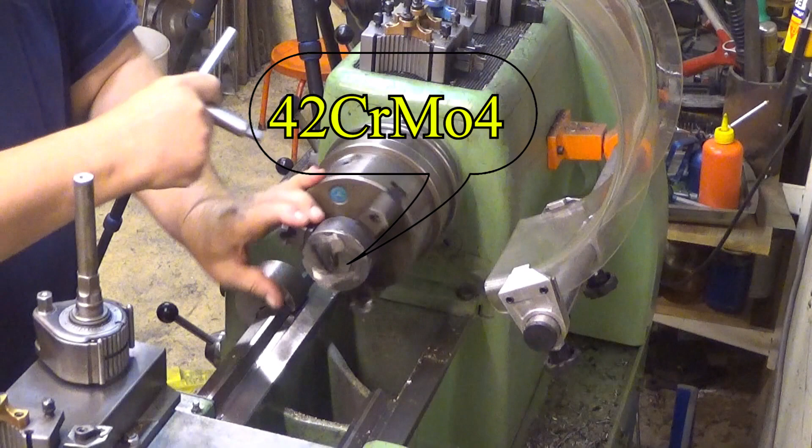Okay, so I have turned these jaws in order to get this comfortably into there. Let's tighten it one more time. This needs to stay there. This was tight. Tight. Tight, yeah.

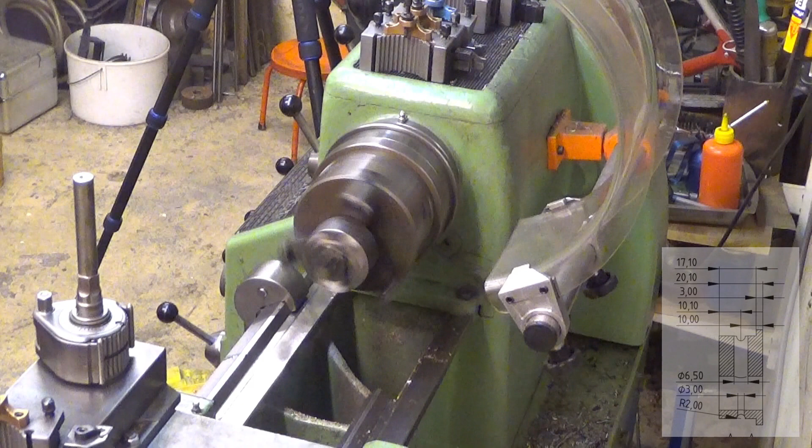I think we should try to run this about 600 RPM. I don't want to... Okay, it's okay. And then I'm using this VNMG tool first to face it. So now let's touch it first.

Well, now I'm trying to get a good surface finish here because this is going to be our final surface. So I'm running this at the same speed, about 600 RPM, and I'm no more feeding it manually. It will be 0.076 millimeters per revolution. And this tool, this bit, is different. It's now Cermet with a very nice round corner. And I'm peeling off about 0.1 millimeters here.

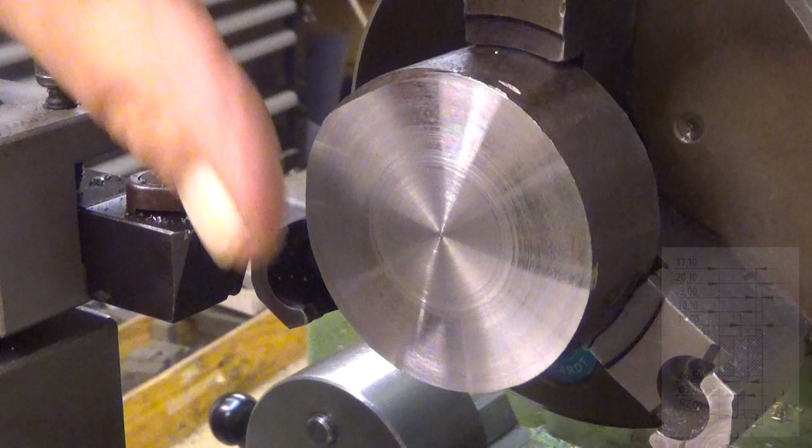Well, let's see now. You probably noticed I raised the speed. Yeah, and it's silky smooth.

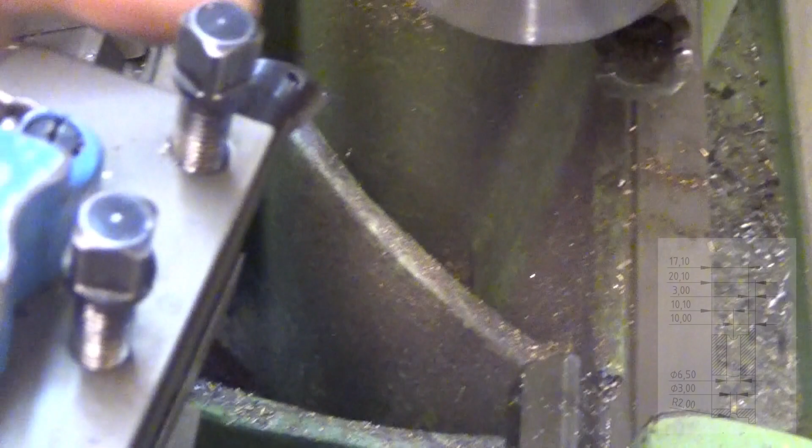So now I have here a boring bar, like that. This is upside down because I need to reach into there, and this is the only tool that I can get near enough here.

Well, okay, but we need to limit the travel from this surface to the shoulder. It should be 20.1 millimeters. I will first cut 20 millimeters there, and after that, the last 0.1 I do differently.

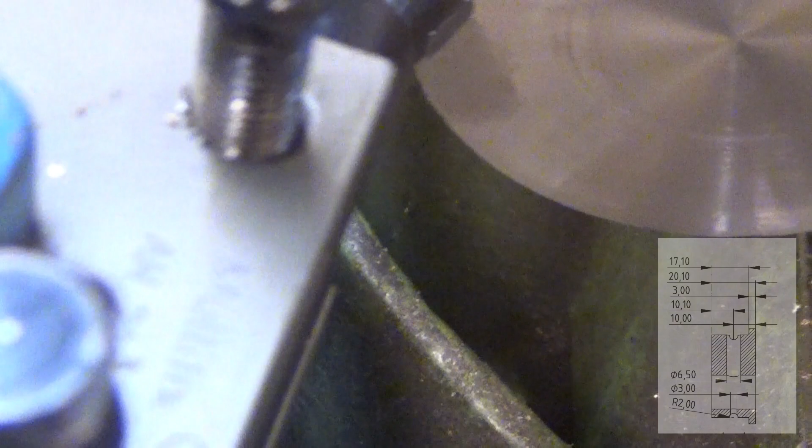Well, now the first thing is to put this tool into contact with, let me show you, put this into contact with the workpiece surface very gently. I can feel it here in the wheel. Now it is in contact, and it's really just gently there.

Well, of course I have locked the compound and everything, so this is not used in this case. So now when the blade is there, we zero this one. This is my travel indicator. It's at zero. So then I retract this from the surface, away from there.

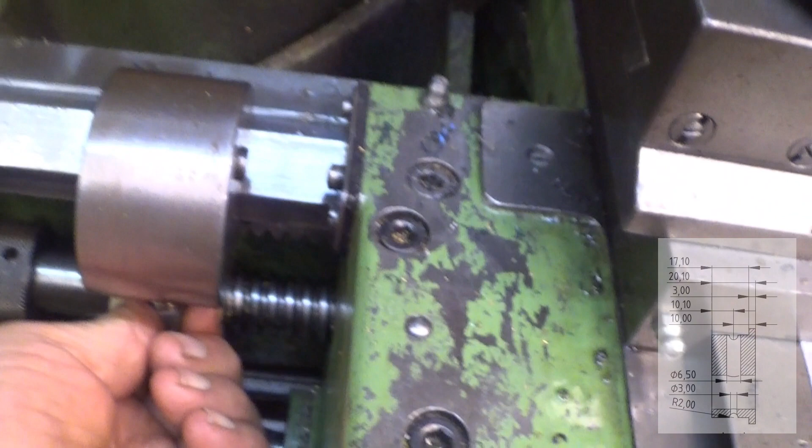Okay, and then this is the carriage stop. I put it against there and tension it even so slightly so that I can still move it, but it gives me some resistance. And then I dial here 20.

So that was 10. Let's check that everything is alright there. Yeah, well, let's put it into a place where everything is really right. So that's 15, and there is really some resistance here. Wow. Maybe, oh well, yeah, okay. That's quite exactly 20. And then I tighten this.

Yeah, there you are. And now, well, now it's just to turn this. It will stop.

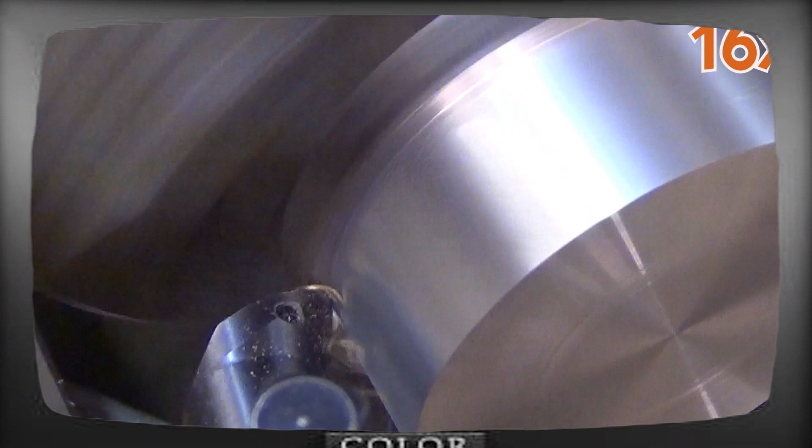Let's put this so that it's almost out of the way, because this is throwing chips all over the place, and then it produces these hot worms, hot snakes. This is because the material is really tough. It's tough. And I'm advancing here 0.5 millimeter, and then we go again.

Wow, but the surface is really nice. Now we should have a tenth of a millimeter to go, but I want to be sure of this.

Yeah, well, if I take a tenth, I end up being a little bit too loose. So it should be almost a tenth. So something like 7.5 microns, no, 75 microns.

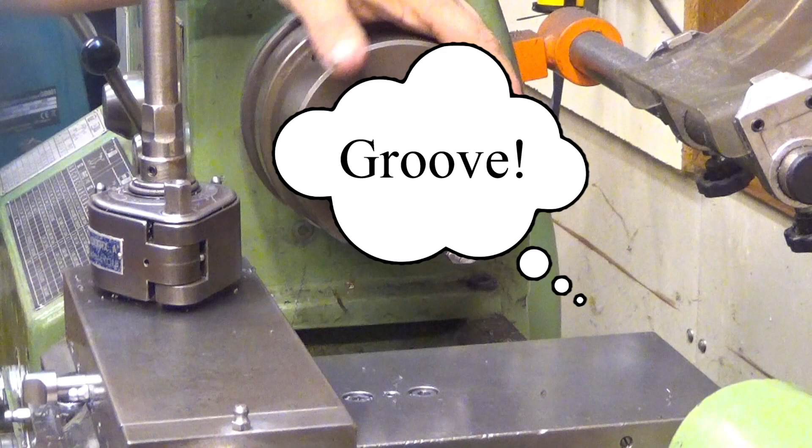So, well, the workpiece of course burst away from there. There you are. Wow, wow. Let's put it there. And then the jaws, first one.

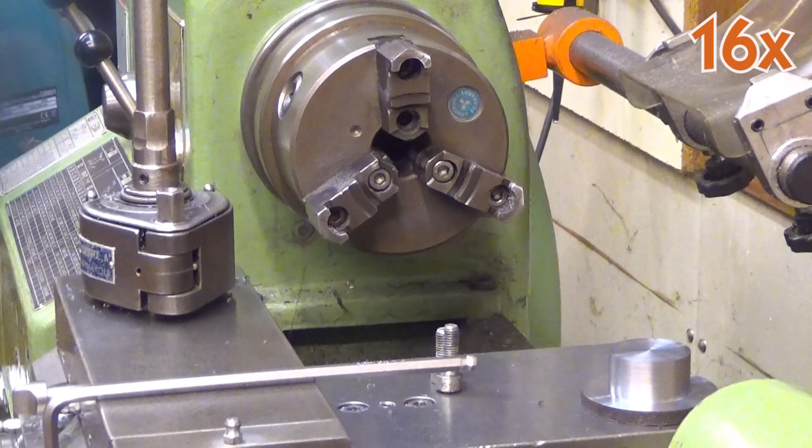There you are. And I want this to be something like 47 millimeters. Yeah, it's 62. Okay, so let's see.

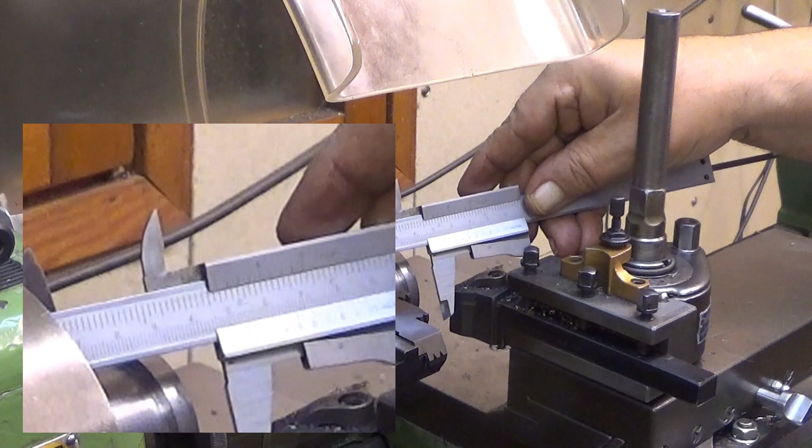Well, now it should be 47. Remember, our goal, the final diameter for this is 45. So, I hope you can see this so that it focuses. It's quite near 47, and now I just turn it around.

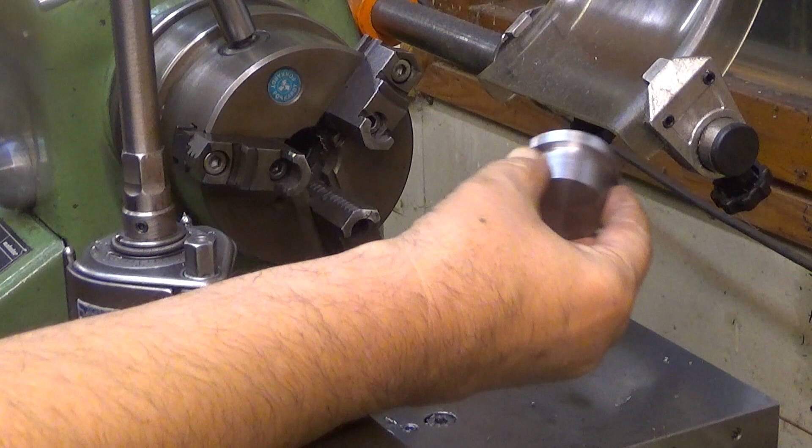Now let's turn it around. Well, here, now it should fit more comfortably than the earlier time because, really, I put it about there. Wow.

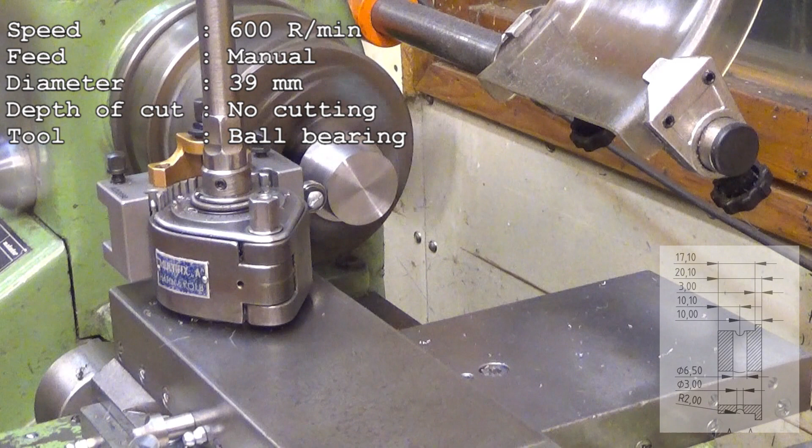Pull it back very slowly, like that. There you are. Now it should be as straight as it can be.

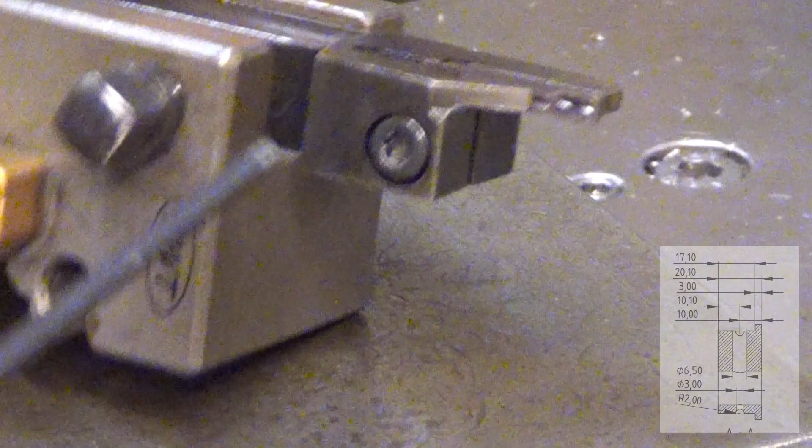I will zoom you nearer so you can see what this is. Okay, this is my normal parting tool, and that was filled with stuff. So, and this is the Torx.

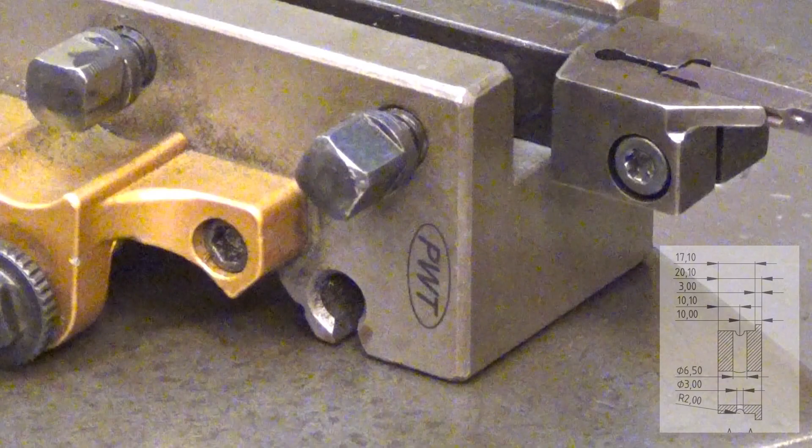Is it like this? Smaller. I bought this as new, and yeah, that's the one. A Torx. Okay, so we'll take the blade out, and then I have

these are made by ISCAR. I found these from a flea market, and if you can see, it's not straight at all. It's like that, but it doesn't fit into that tool holder, so I need to use some construction here. That fits well, but then I need to put something here in between, and that's actually the correct width.

And now just push it against there and then tighten it there. There you are. We have a grooving tool.

Okay, setting the correct place for the groove. The groove should be measured from this surface. It should be 10.1 millimeters away. The center of the groove.

If I now go, yeah, 10.1, then that's 10.1. There, well, the accuracy of that device is 0.1 millimeters. So, there you are. Well, of course not with this speed.

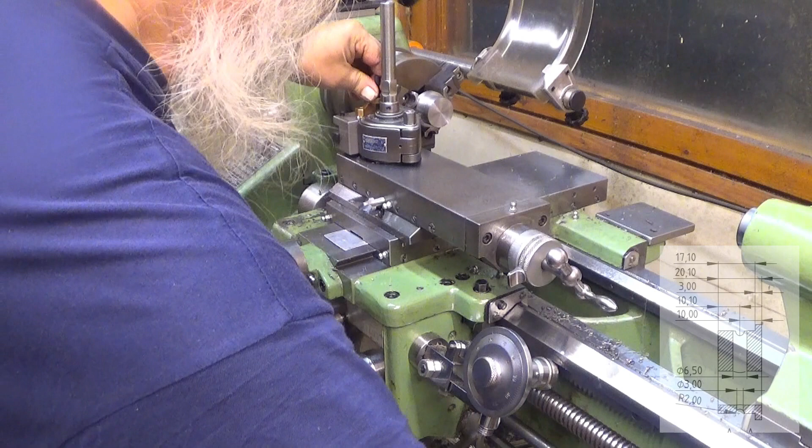Probably a little bit high. It doesn't want to grip into there. Well, this means that I need to fix my parting blade after this. I need to lower it down just a tad.

Let's try that. Because it needed, well, probably the blade is dull. So let's see about this. I need to do everything again, but such is life.

Let's see, for the center height of this tool. Well, it's way high. Okay, that explains it. It was really high, like 5 millimeters. That's bad.

And that explains it. Can we align with, well, 10.1. Yeah, I didn't lose it. So

now it should cut more freely. Let's see. Yeah. Huge difference.

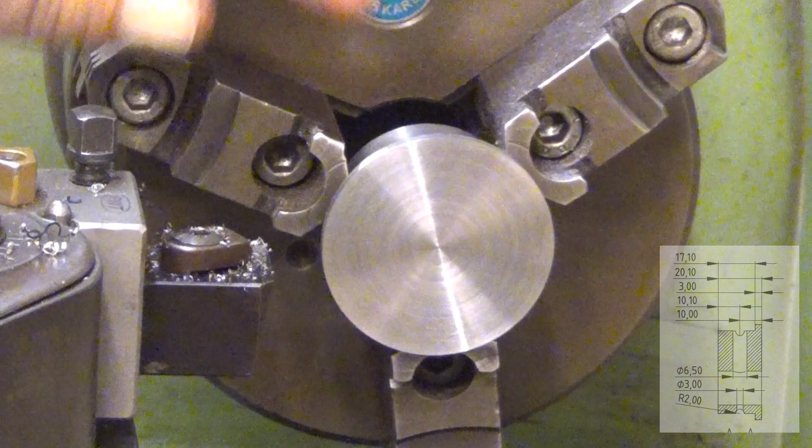Yeah, okay, let's see, it's really smooth. Okay, and now it should be 3 millimeters. Quite exactly, actually.

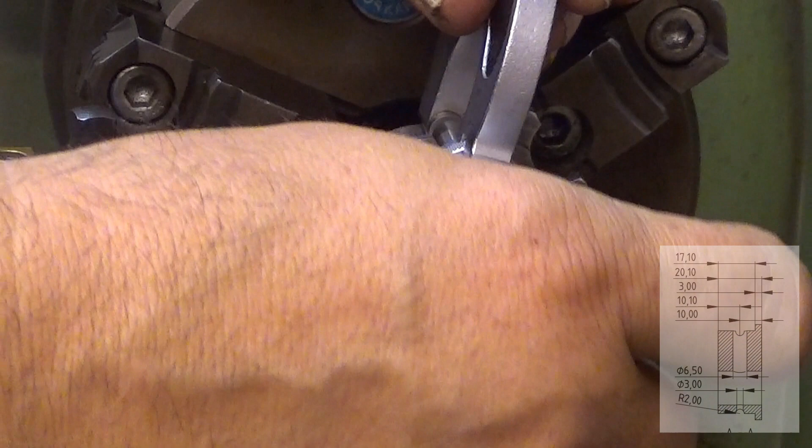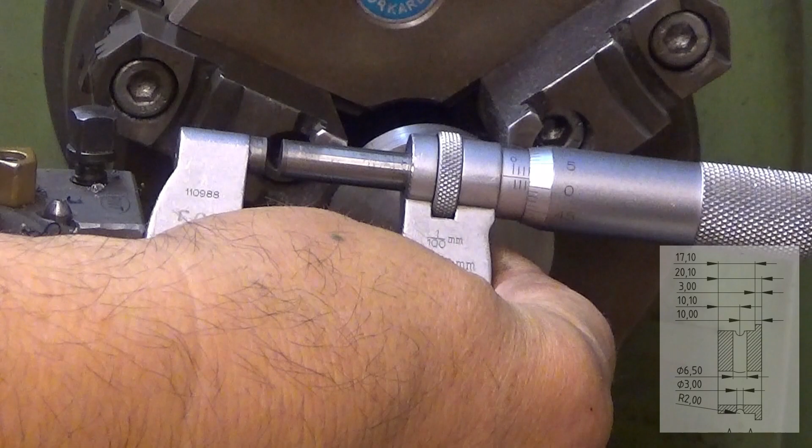Doesn't deviate too much.

And now I will make the same for this surface, and now I don't know how to, well, I know how to, I just need to do this really gently. So, now it should be straight enough for that kind of operations.

And apply again. At least it's shiny.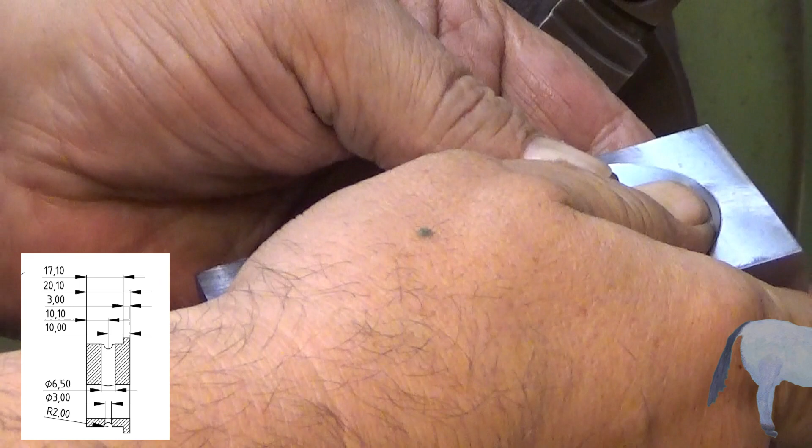Oh man, that's not good. That's too much. Why? What did I do wrong? Is my dimensions, my dimensions, well, it's a perfect fit otherwise. Oh man, but why this? Wait a minute. Yeah, 17.10, not 20. This is now 20. 70. Can I face it?

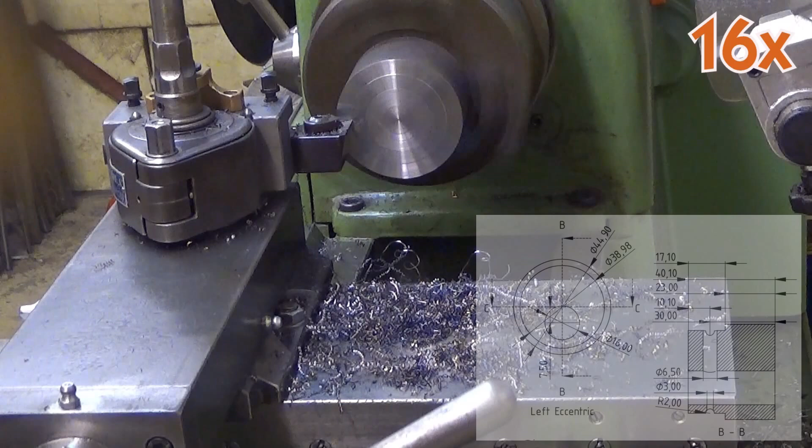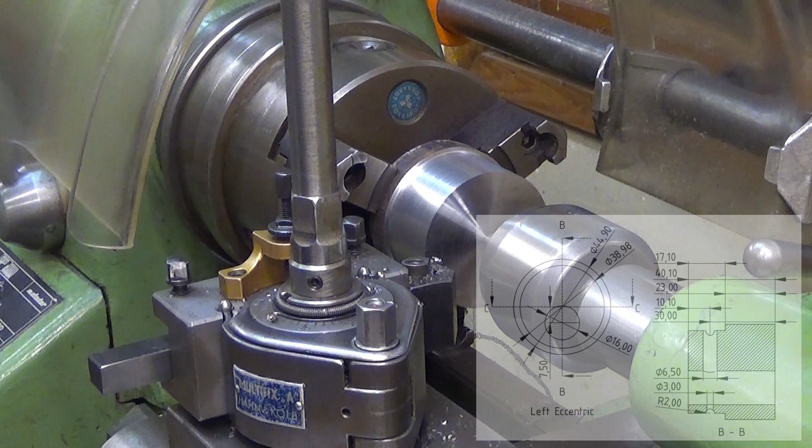That's really bad. Wow. Well, the chips come out blue. Hot snakes, really.

Well, I finally solved the riddle of chip breaking here. It's actually the speed. If the speed is like 600, the chips become blue and then they become really long, not good. So now I'm running this at about 300 RPM. My feed is 0.152 millimeters per revolution. The cut-off depth is half a millimeter from diameter, so 0.25 from each side. And the chips become about this long.

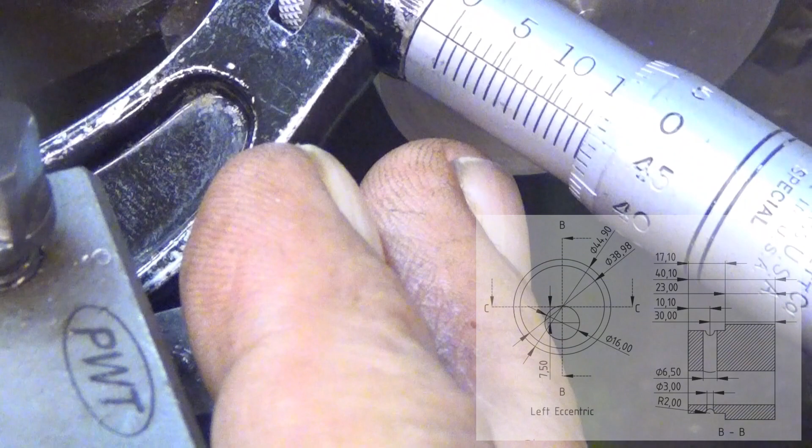Let's see now. This should be 38.98 whatever. Well, 95 seems. 38.95, quite exactly that. Well, here is now the place for this groove. Well, let's make it.

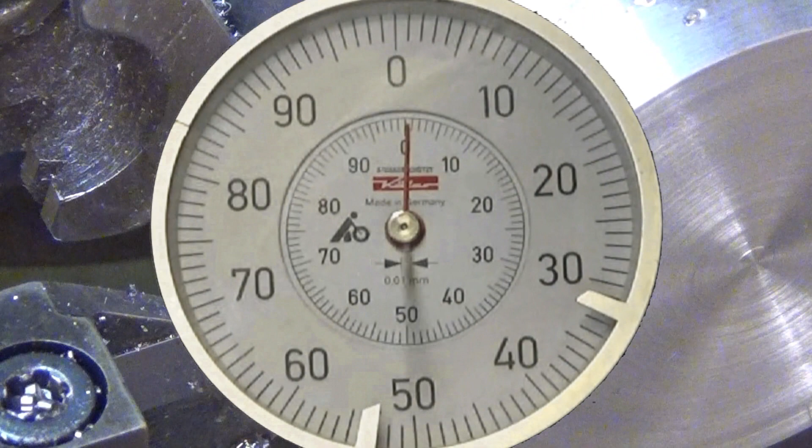There is a groove. This workpiece. First I will now dial it in into there. Okay, that's okay. Tighten it there. We have a very steady base for our dial indicator.

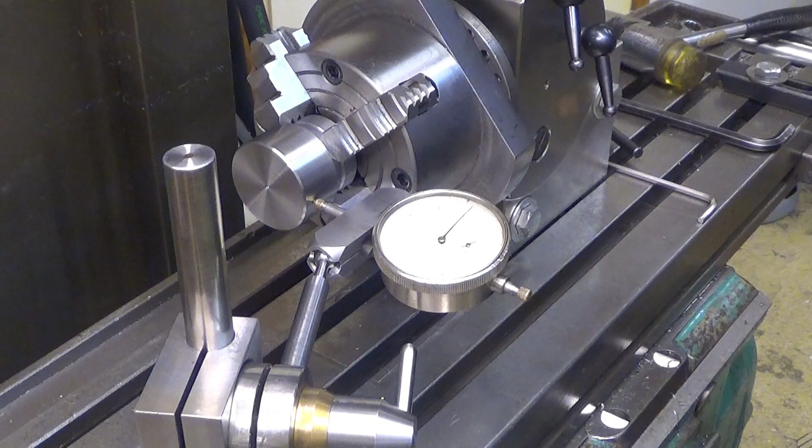And then I put this here, and then we have our dial indicator. Just planning here. Okay, like that. And like that. Oh, okay, it's about in the middle. And then let's turn it so that you can see it. Well, I should also be able to see it. So let's see that we can rotate these now, and we cannot.

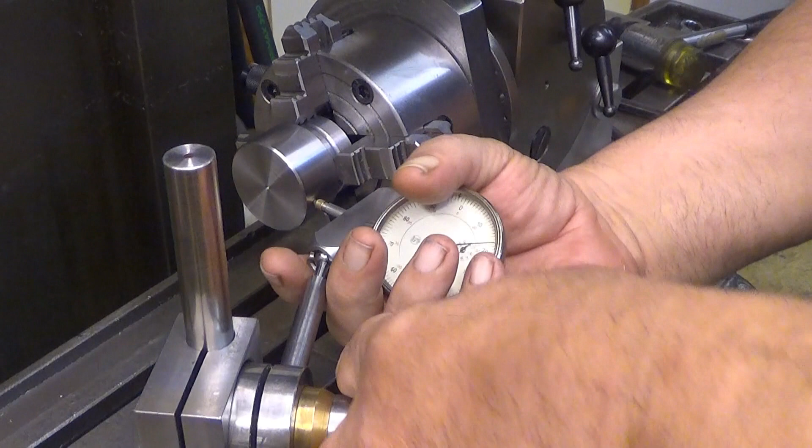Well, now we are there. And it's about, the tip is not, it's tilted. Well, it's tilted. Why not make it straight the same way? Now it's about straight. And as you can see, this is really steady. Of course, I can push it, but it always returns to the same point. This kind of dial indicator stand is one of the best.

Okay, now the next step here is to find the minimum. Well, it's way off. There is our minimum. Like there. And then let's see if it's over one turn. And it is. Okay, that's high. So I need to just put it coarsely there first. Let's loosen this one here.

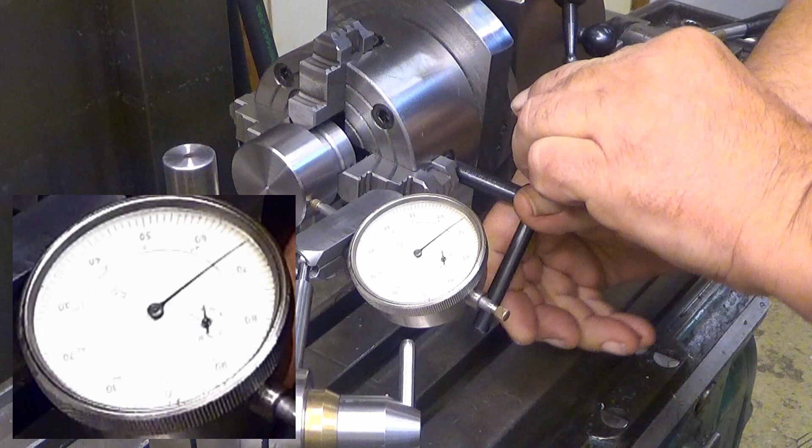This would be a very tedious process if you do it the wrong way. Okay, let's see now. Let's find the minimum again. Well, now it's a lot better. There is our minimum. I put my 0 there. Okay, maybe, yeah, maybe. And then I find the maximum, which is, wow, 50. Okay, so midway is 25. So all what I need to do now is to dial these to 25.

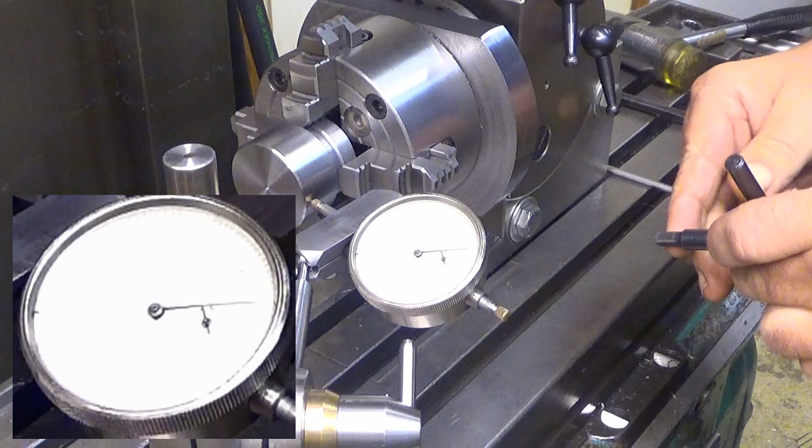Oh, that's the wrong way around. And yeah, this is really like, you can do this in one pass if you are careful enough. There is the 25.

Okay, then we go to the next pair of jaws. I put them, okay, like that. And then this one should be a little bit that way. Let's just dial them to 25. That's because that was the midway of the minimum and maximum. Now, well, let's see.

As you could see, now we have some very slight deviation there, like two hundredths. Our midway was not correct, it was not 25, it was something else. There is that now. And then this also a little bit like that. There you are. Well, it's a little bit still.

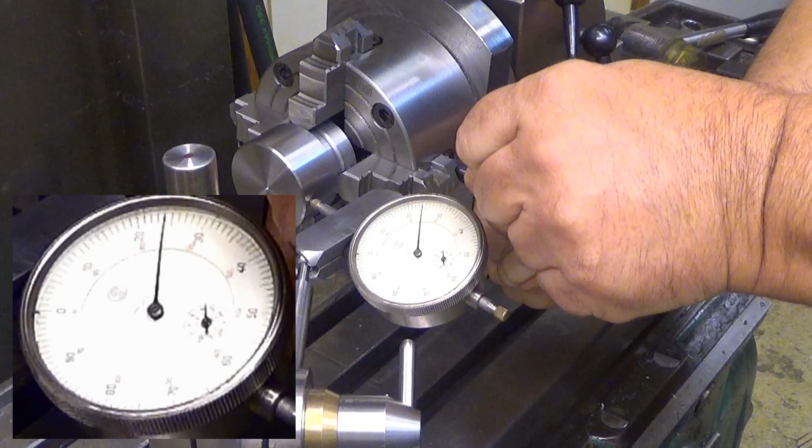When I purchased this, I cleaned it up, this dividing head, and tightened everything. And it's not a loose thing, this. And now you can see it's there. We did dial it in, and it's not a tedious job like in an ordinary four-jaw chuck, because this is so accurate. And it's, well, you have to have a very steady dial indicator stand. If this would be the ordinary one, it's so easy to stumble into it. And then your measurements are all wrong.

Well, I can remove this now. And I can remove this. Well, it's just a T-nut, a very heavy-duty washer, 16mm shank, and well, works like a charm. Oh yeah, and that rod, it's hardened, case hardened, very tough material.

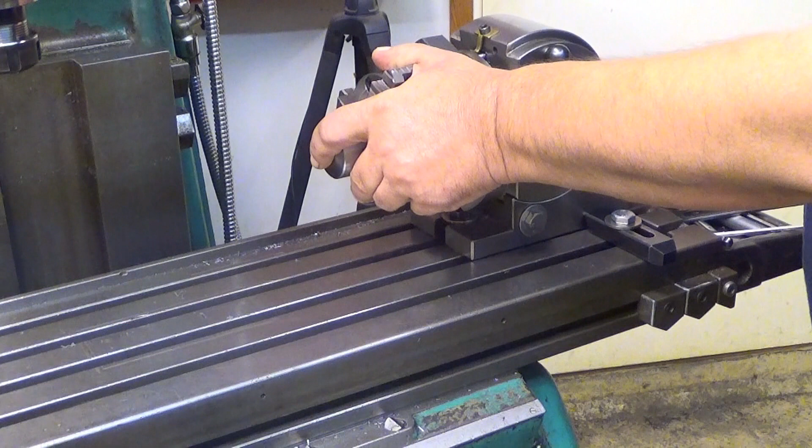Now it's quite far away. I have a thing like this. Seems to be straight, and it's leaning against the fence. Yeah, there it is. Just tighten it into place.

Oh, this is a little bit. Well, now it is, yeah. I'm looking for these jaws that I can fit comfortably there. There you are.

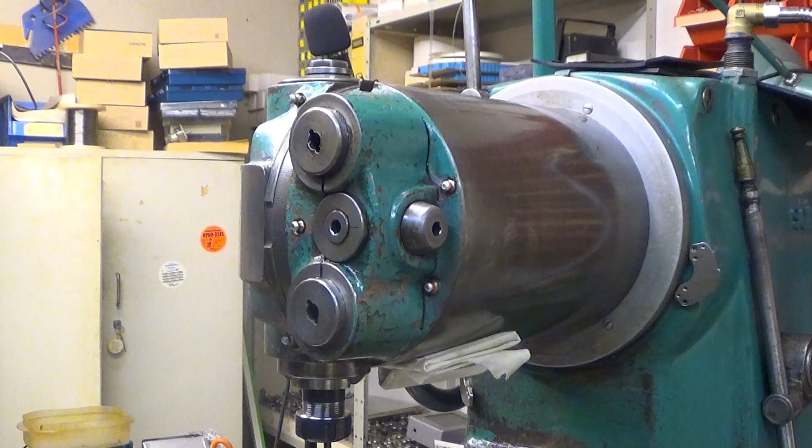Now it's positively locked. Doesn't rotate at all when I use this indexing mechanism here. Okay, and now we need to adjust this to a correct position, and this one is pretty easy. You just loosen the brake and then you turn the head, and you have to be really careful not to move it sideways, but just rotate it. And this is actually quite easy with this machine. You can do it like this.

And then I search here for zero, index it there, put the brake back on and remove the index. This machine, if you have these series 51, 52 or 53 machines, they have an indexing mechanism for this rotation. And you should always disconnect it after indexing, because if this catches something, it will try to rotate the head, and if that indexing mechanism is engaged, it might damage it. Yeah, okay.

I have not moved the table in Y direction, so we should be good to go.

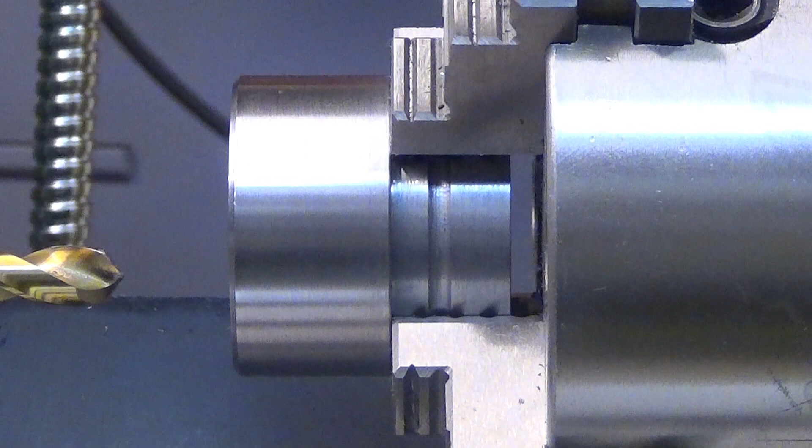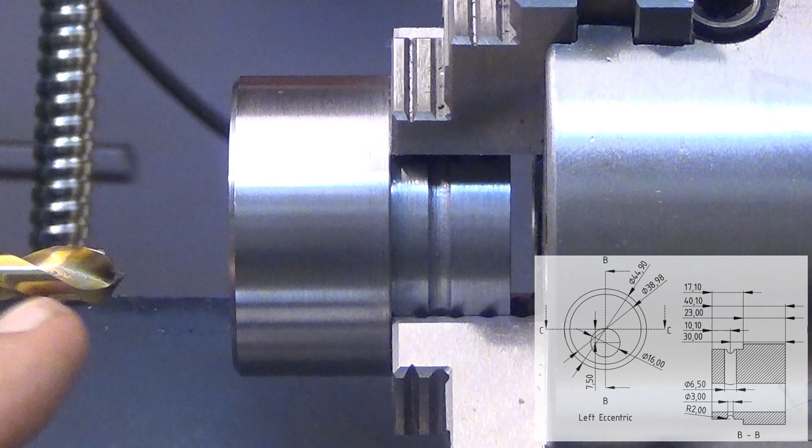Well, now let's drill. And when you are drilling like this, don't forget this. There are very good chances of bad things happening here. For example, if this rotates, it might bind your drill, and at least my milling machine has enough power to shatter this, and then you have high-speed steel fragments, which travel really fast. It's better to have one piece of those sticking on your forehead than sticking in your eye.

Well, I'm running this about 400 revolutions per minute. Let's see. Yeah, and I'm feeding this manually. Yeah, so let's go.

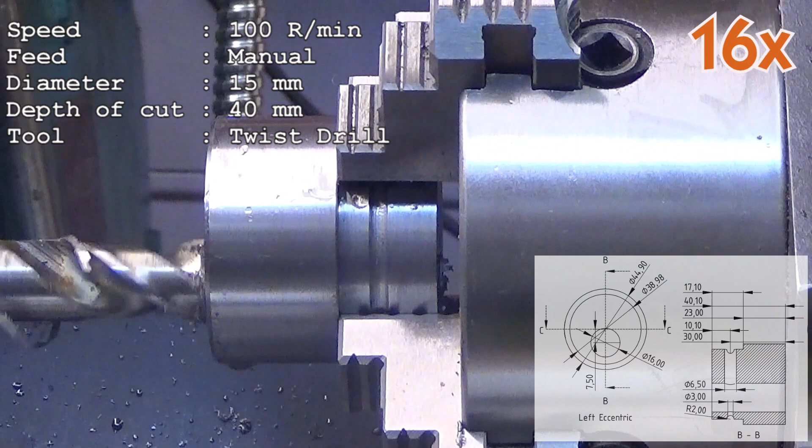Okay, that was easy enough. Let's take these and put them into the bin. Whoa, you have to be careful, those might be sharp.

Yeah, okay. And then I will change something here. So it's in back gear, so I can loosen it. That, my knocker again, like that. Hopefully, yeah, it comes. That's one of the benefits of this type of taper. You don't need a lot of room to take them out.

Should go there. Does it? Well, we need to lower the table a little bit. Well, 10 turns. 1, 2, 3, 4, 5, 6, 7, 8, 9, 10.

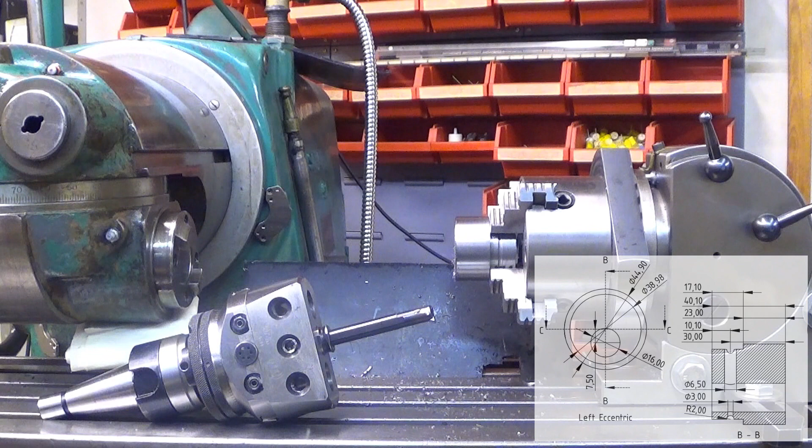What I will now do, I will remove this from there. Now it should go quite easily actually. Yeah.

Then I put this in free gear so I can rotate this freely. This is really not good. Okay, maybe we can do that. I need some visual reference here. When I tighten this, so I put, there is a flat here, but you can rotate this quite freely.

But now I put this here and try to make it level. Oh, man. It's about there. Yeah, and then I tighten it in place, and this is really, it has very tight tolerances, this thing, and while it's now there.

Wow, I think we need to back it up somewhat. This knob locks the ways and things, so I pull it back like that, and then let's go into the bore and let's touch. This should be sensitive enough so that, yeah, there it is.

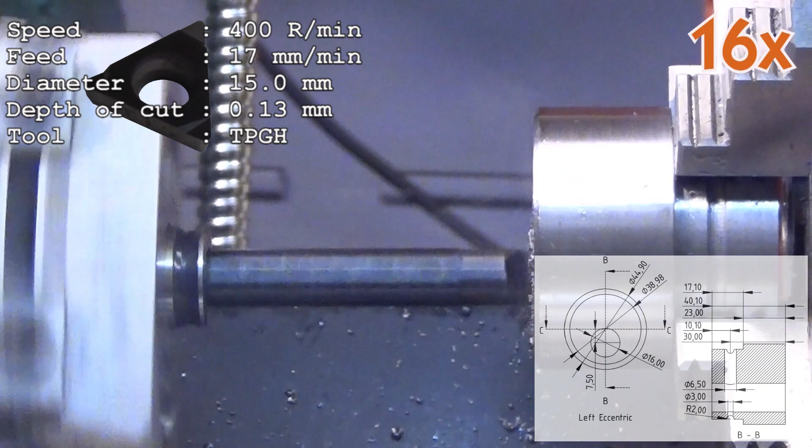Well, let's now measure this one. So first I need to move this so that I can put my measuring stick inside there. So I lower the table 10 turns here. 1, 2, 3, 5, 6, 7, 8, 9 and 10. So let's put this into there. So, and then push it up.

Until it, well, not good. Maybe I should move a little bit away that way. Okay, now. Oh yeah, okay, now it works. Well, we are at 15.27, I think. Oh, 73. Okay, but we are now on 0 with this one.

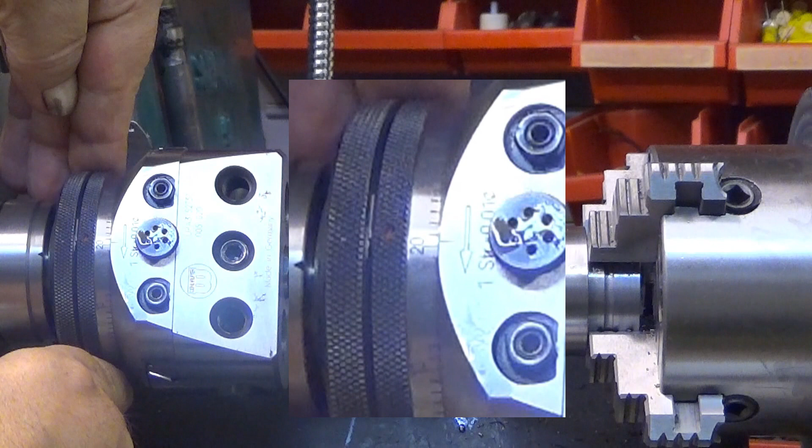So that's easy. 27. But I don't want to push my luck by dialing everything at once. So I think we can safely take 0.2 millimeters at a time. Let's take a little bit more, like that. And then 10 turns up. 1, 2, 3, 4, 5, 6, 7, 8, 9, 10.

Wow. Well, 1, 2, 3, 4, 5, 6, 7, 8, 9, 10. I doubt that, but you never know. It didn't make it too big, it made it exactly as intended. Well, yeah.

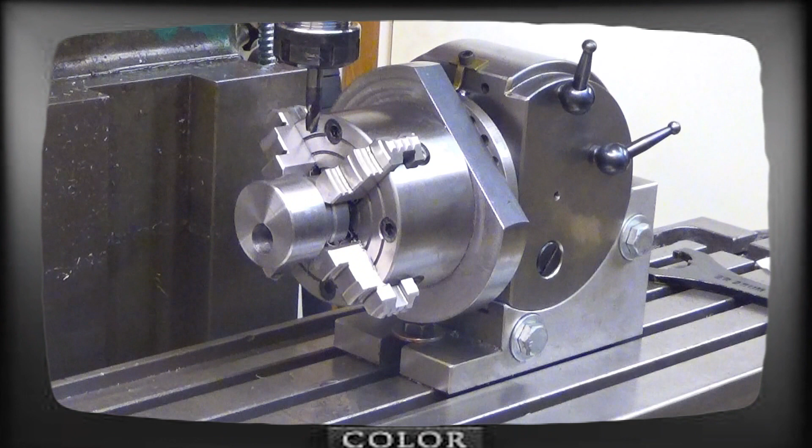Okay, now milling a flat here in order to be able to drill a hole. That's the flat. Now a 6.5 millimeter hole, and it's running about 390 revolutions per minute, and I'm feeding this manually.

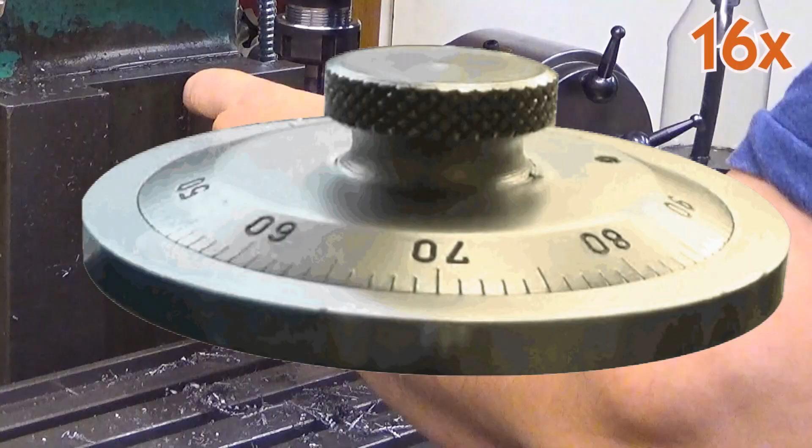Making the thread into this blind hole. Well, I aligned this using this 6.5 millimeter drill so that it's sitting straight. Now it's time to get rid of that drill. Now it of course drops. Oh yeah, okay. And then we need this spring-loaded center.

There you are. I'm going to use this kind of tool because this didn't have the centering hole there, so we can use that one as centering. There you are. Just some lubrication and then we go. Man. Well, yeah, it's somewhat stiff. Yeah, it is.

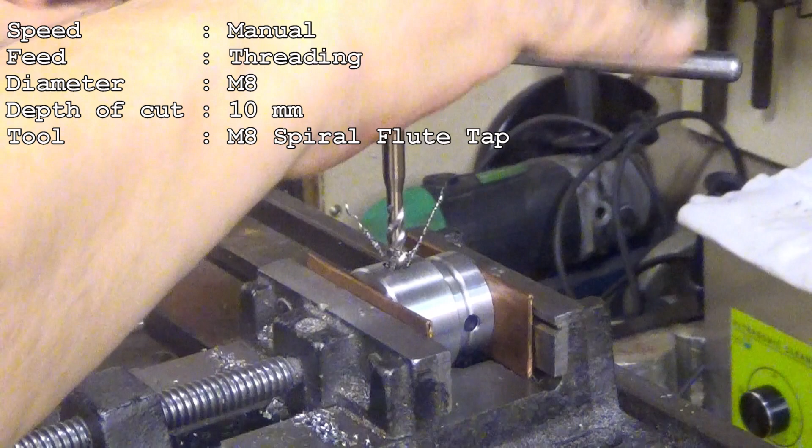But we get it done. A lot of force is required here, a lot more than I anticipated. Let's take the chips out from there. These chips are also really hard. Okay, we are still not at the bottom. And this, oh, now we are at the bottom. Yeah, there you are.

And this was the most dangerous of them all to thread. There you are. Now we go. Hopefully it doesn't break in the hole. It would be disastrous, because this requires quite a lot of force. I don't like this at all. But what can you do?

This is totally different material than... Oh man! We should be already there. Maybe I break the chips a little bit. Yeah, it helped, they started to back into the... Okay, and we are through. Wow!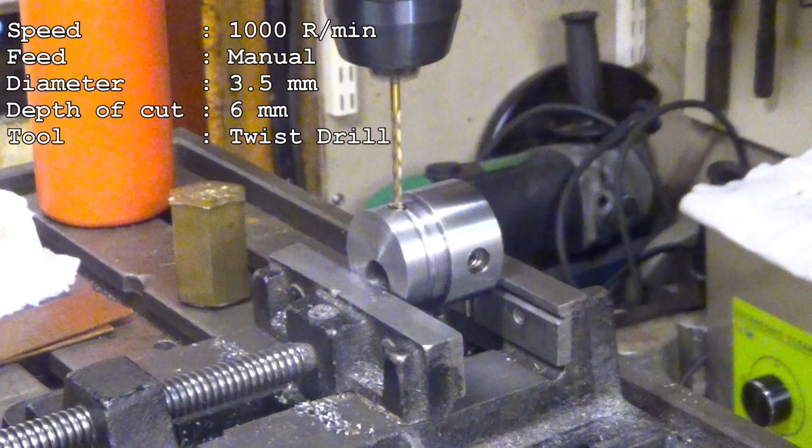Hopefully in the correct place. Yes, it did. And now we just go through. Yeah, it was a good idea to see what's happening inside there. Yeah, this really is sharp. Yeah, it's really sharp, it grips.

Yeah, okay, that's done. Well, then we of course have the other piece. It's a very similar process, just we don't have the hole for the handle. Other than that, it's a similar process.